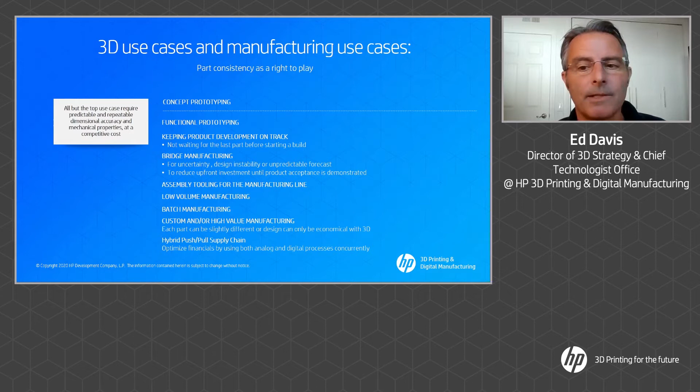It's to dispel a fallacy that's happened in the 3D print industry, which you've all probably heard at other events, that the beauty of 3D printing is you can go directly from design to production. The fact is, if you have quality requirements, part consistency requirements, you cannot skip that development phase.

You have to develop and validate that the part and the process together have the consistency of properties you're looking for. In that development phase, the people on the design side, demanding parts on the left-hand side, have to design the parts to the process they have in mind. And the people on the right-hand side supplying the parts need to tune the process to the specific part. And there's a reason for this: physics.

The reason is explained in the following slide. The physics of thermal processes—I'm talking specifically thermoplastic right now, but this applies to all thermal processes—is that part quality is both a function of the thermal history, which is a function of both the part geometry and the process settings.

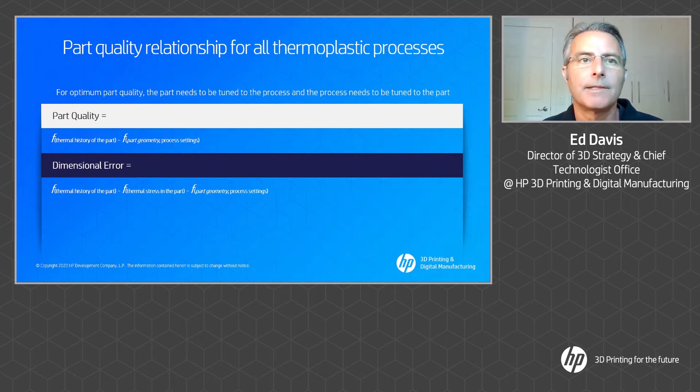So in the next slide, I'll show specifically what HP is doing to address this. On the design side, on the demand side, we have an MJF Engineering Handbook—MJF stands for Multi-Jet Fusion—which you can get online for free, or we offer a professional service for design for manufacture so that you can tune the design with the guidelines of MJF in mind.

On the right-hand side, we've introduced a process control software that allows the process engineer to tune the batch settings to the specific part and batch you have in mind. Using those two together, you go through this development phase, and then you can go into production with our production systems. This enables both the design and supply side to achieve a consistency of accuracy that we describe in the following slide.

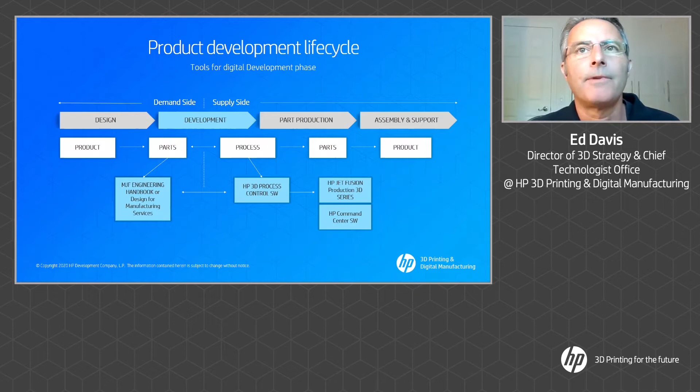There is an international tolerance grade, a standard for explaining what dimensional errors are possible. The first thing to note is that the small number is better than the large number.

If we go to the next slide, I'll show you the relationship. This is an international standard, both an ISO and an ANSI standard.

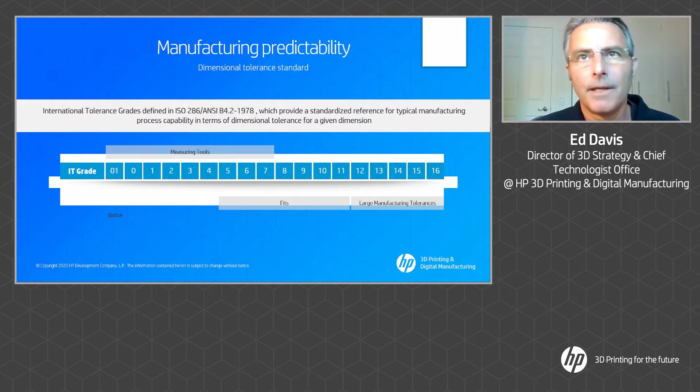People often ask, what's a good dimension to achieve for a multi-part mechanism? I often look at the 400 millimeter dimension, and that's quite a large error if you go to IT15. As you go to IT13, IT12, IT11, the numbers actually start to approach each other. So generally speaking, for multi-dimension mechanisms, you're looking for an IT13 or better to have good interaction between the different parts in a mechanism.

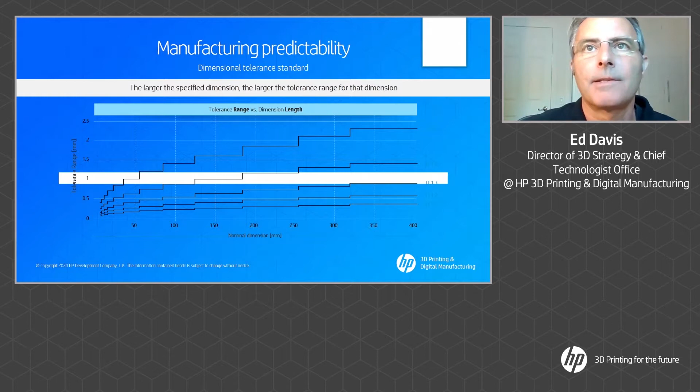If you go to the next slide, what we've been able to achieve with this process control software and following the design guidelines is the following. What you generally find with typical injection molding is that a highly precise mold will get you anywhere between 8 and 11 on this IT scale, which is phenomenal. It's actually very, very good tolerance.

To get better tolerances, you have to machine it. A normal mold will get you 11, 12 on this scale with a CPK of 1.33. Typical 3D processes are in the range of 15, 16, 17, and aluminum molds are generally 14, 15, 16. So as you see, typical 3D processes are far to the right on the scale.

With our process control software and following the design guidelines, and using the latest model 5200 to produce the parts, we're able to achieve an IT13 on the X and Y axes, and a little bit worse in the Z axis because the resolution is lower there. So what we're actually able to achieve is more direct competition with typical injection molds.

So what that allows a person to do then is open up the use cases beyond concept prototyping. And what this means to a program manager, I'll explain in the next slide.

The program manager is typically a hardware program manager, whether you're a program manager for an automobile, a printer, or any other device. What you're typically trying to do is balance the scope, the schedule, and the investments or resources to optimize the return on investment. The scope is the functionality of your product, and it needs to be different than the competition, and different than your previous version of the same product. Schedule, of course, is time, and investment is literally the money you put into resources or other investments.

So let's focus down into this program manager's world by going to the next slide. And what I want to focus on is how they balance investments versus cost.

Now, for 3D printing, they tell you the following story. If you advance to the next slide, please. They tell you that regardless of whether you're printing one part or two parts or 1,000 parts, the parts cost the same. That's not true. What I just explained is that you have to go through a development and validation phase, even with 3D printing.

You need to at least set up the quality processes for your 3D printer. Setting up the quality processes means programming a CMM to measure the parts, developing a holder to hold things in place while the thing measures things. It's going to cost you probably $1,000 or $2,000 just to set up the quality processes. So if you're going to make only one part and have quality requirements, it's going to cost you $2,000 plus the cost of the part. There's always an upfront cost, always a setup cost. There's no such thing as a straight line unless you skip that development phase, which you should not do unless you don't have quality requirements.

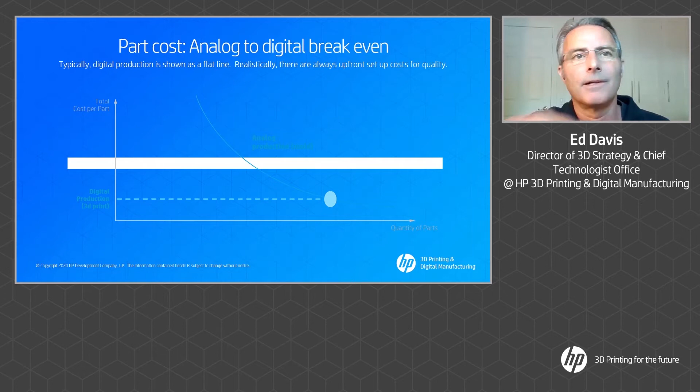A bigger problem with this curve is what they say: if you hit that break-even point, less than that break-even point, you should 3D print.

A worse problem is that many 3D processes are very expensive and don't produce that many parts. For example, if you were going to produce parts with a laser sintering machine, and that machine could produce 2,000 parts a year, but your production quantity per year was 10,000, you'd have to buy 5 laser sintering machines costing about $300,000 apiece and dedicate those to that part. That's $1.5 million. There's no break-even. You better buy a $20,000 mold, because that's a lot less expensive than 5 laser sintering machines. So the problem with this break-even story is the bad ratio of productivity divided by acquisition cost.

That's the case for most 3D print processes up until today, where we now have processes like multi-jet fusion, which are actually quite productive.

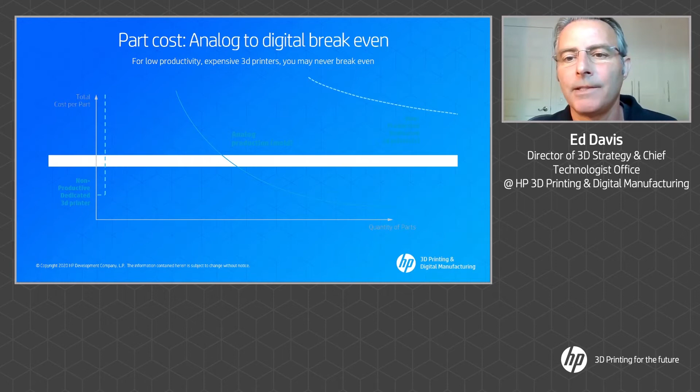Now, the thing I really don't like about this break-even story is that this is not how program managers generally do accounting. Let me show you how program managers generally do accounting.

You've got upfront costs on the left-hand side, and that's your return on investment. Then you introduce the product, and you have a P&L, a profit and loss statement for that product line, and the part cost is part of the loss of the P&L.

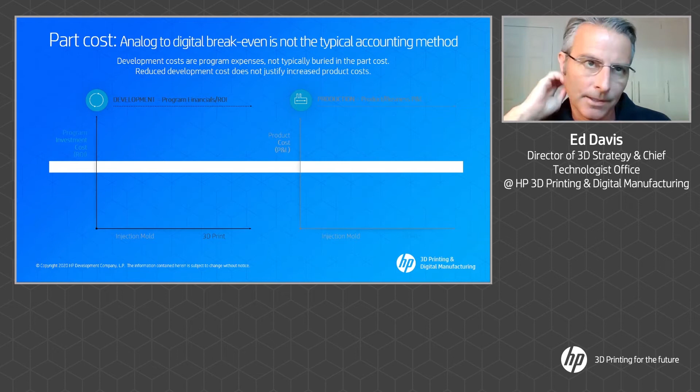So the story goes: in this break-even scenario, you pay a lot for the mold, and as a result you pay very little for the molded part on the right-hand side. With 3D printing, you pay nothing for upfront development, but the part costs you 10 times more.

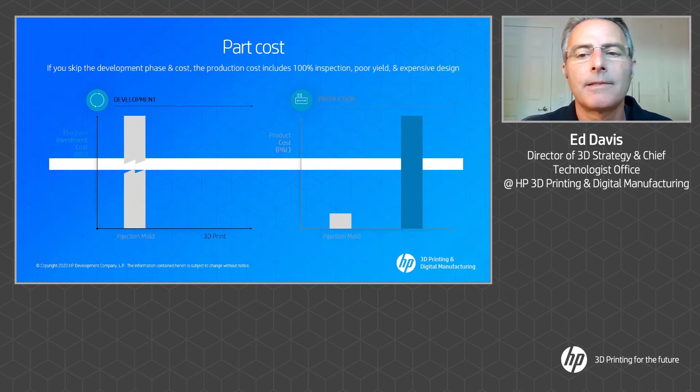But the fact is that this is not really how the situation looks. What really happens is that you can do process tuning, like with process control software, which takes a little bit of investment on the left-hand side, but it reduces the part cost on the right-hand side.

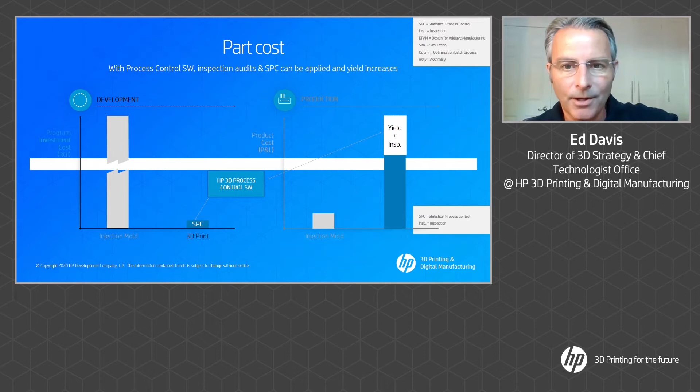You can also follow the design rules for the process and improve the quality even further. It requires more investment on the left side, but you reduce the cost even further.

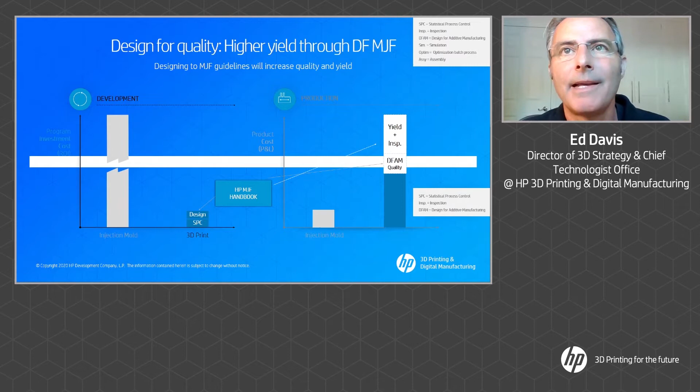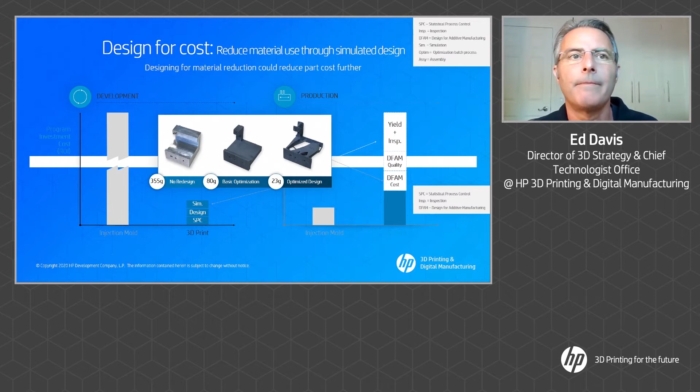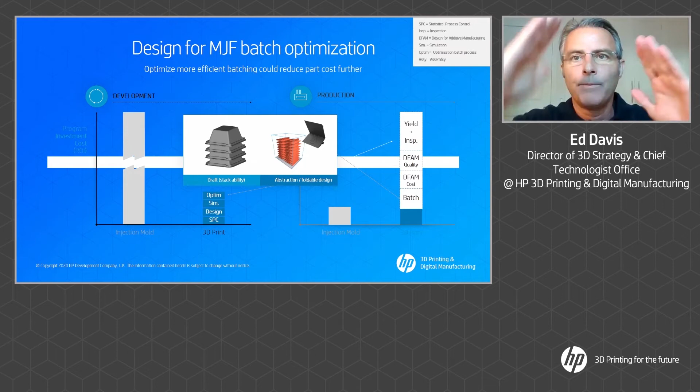You can apply material reduction through generative design and topology optimization and reduce that cost even further. Or you can make slight changes to the design so that you can fit more into a batch. For example, in that picture, if that stack of parts were square instead of angled, you could only fit so many in a batch. But by putting a slight angle, you can fit more into the batch.

So the batch, in fact, is the primary cost. And you start to approach the cost of that injection molded part by applying all of these techniques.

But oftentimes the cost efficiencies of injection molding are phenomenal, so your 3D printed part will still cost 2 or 3 times more than the injection molded cost, with one exception, which is shown next.

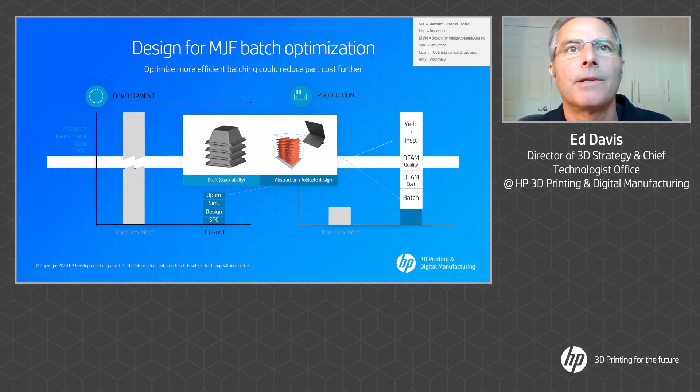When you have a design like this, and this is a real design in our 3D printers, it's an airflow system to keep the pens cool while we're printing.

It's actually shown upside down, but when we turned it into moldable parts, we had to break it into parts which could be molded, ending up as 6 parts plus assembly. If you 3D print it, you can print it out as one part without further assembly, which really optimizes the cost. And then, our friends at Siemens helped us optimize the airflow through that system.

So it actually has higher performance than the original version or the middle version. The fact here is that not only can you do cost optimization, but you can get a higher performing product. If you compare this integration of several parts to the cost of several injection molded parts plus assembly, the 3D printed version is actually more cost effective. So what can a program manager do with this information?

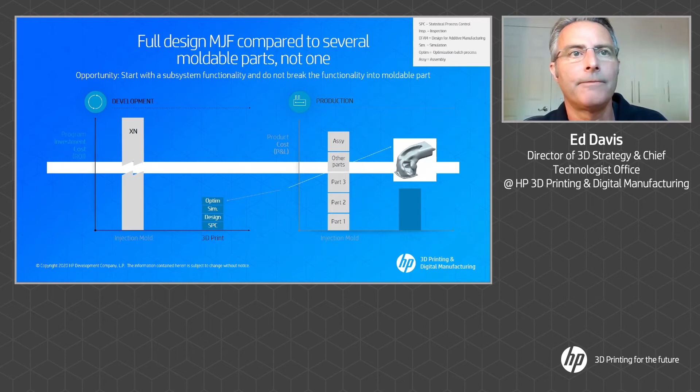Let's focus now on a story of investment versus time. If you could advance, please. Go ahead, one more.

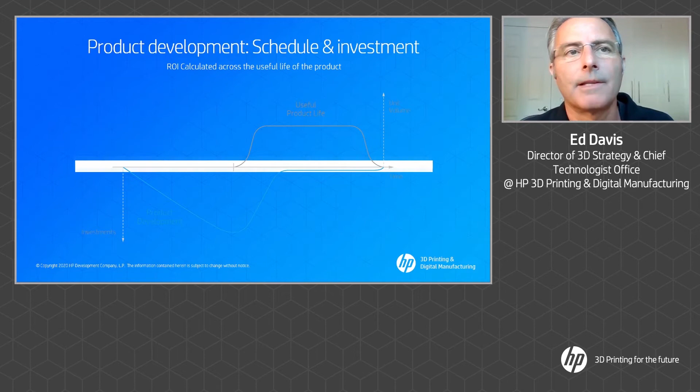You can think of this graph as return on investment. Now there's a serious concern in a program manager's mind when you're near the introduction of a product and you've got a technical issue and need to delay. What happens is your investment profile continues at the high rate — you don't go back to zero. You continue paying for everything until you solve that problem.

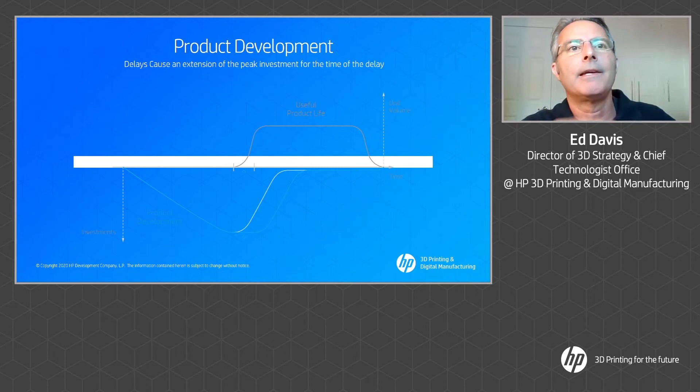When you start to delay, your return profile is actually shortened. You don't lose the ramp, but you shorten the competitive useful life of your product. Mercedes is not waiting for BMW to solve their problems, so the competitive life of your product becomes shorter. If you recalculate the return on investment at that point, you may conclude it's actually a bad return on investment.

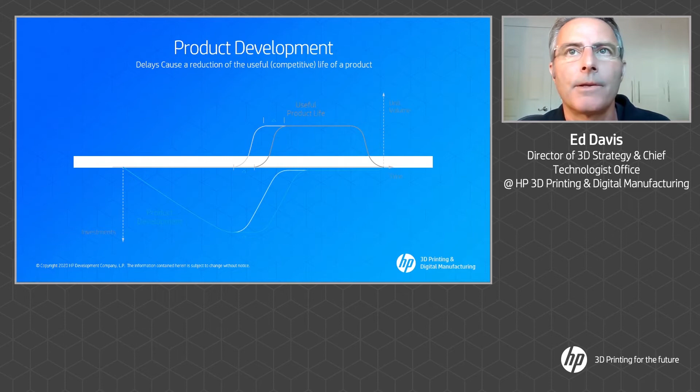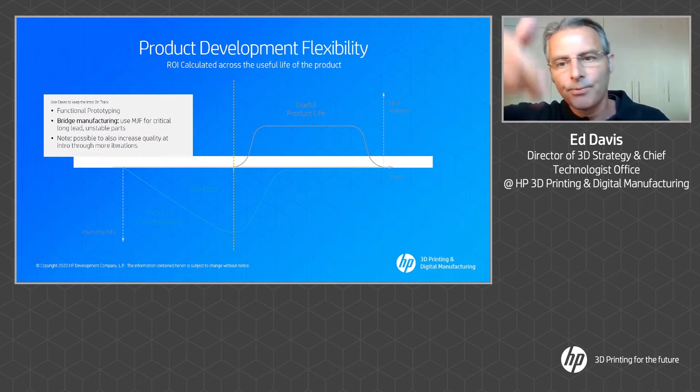Of course, you always convince yourself it's better to keep going than to start all over — you do some accounting games. So what 3D printing can do is actually enable that program manager to keep that schedule on track through strategies like bridge manufacturing, which we'll describe in the next section.

So with 3D printing, what do you get? You still go through a development and validation cycle, but it's much shorter than if you were injection molding the same part. With 3D printing, you can do that development and validation in a week, maybe two. With injection molding, depending on the complexity of the mold, it could take 10 to 20 weeks. So what you get with 3D printing is a shorter development and validation phase, which should allow you the following benefits.

What you get then is less time, less investment during the development phase, and a slightly longer production phase. At the end of life, this is how end-of-life parts are generally managed: when that BMW Model 3 is obsoleted, BMW does not keep producing spare parts on a monthly basis. Instead, generally speaking, they do a lifetime buy of spare parts and put those in inventory around the world in case that obsoleted BMW breaks in the next 10 or 15 years.

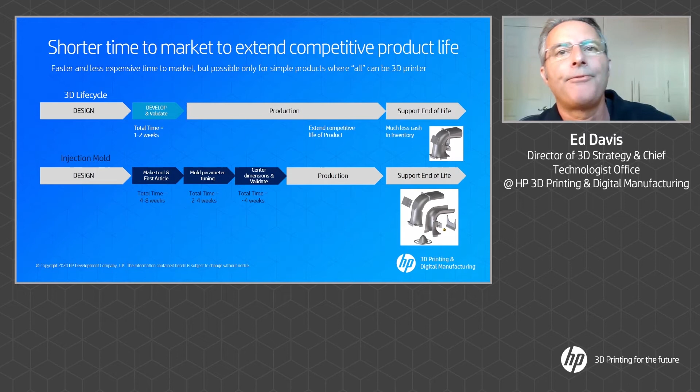Now, unfortunately, in an automobile, most of the parts, it's going to make sense financially to injection mold them. So this is not a real scenario for most parts in the BMW Model 3.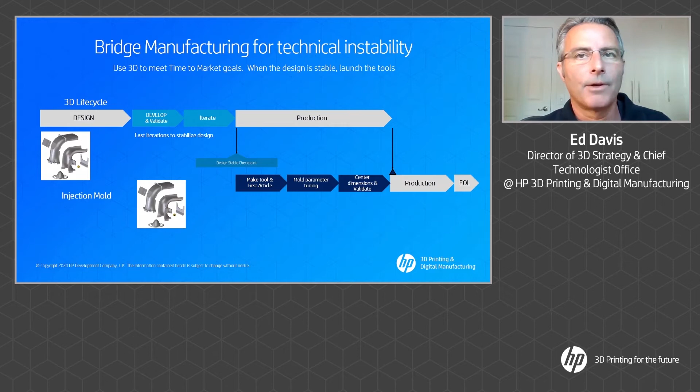And when those molds are ready, switch production from 3D printing to the more cost-efficient injection molding. This is bridge manufacturing. It's bridge manufacturing because you start with a type of manufacturing bridging to your final production method, which is most likely more cost effective. So this is one reason for bridge manufacturing.

In the next slide, there's kind of the opposite story, which is up on the top: you start with an injection molded version, you introduce the product, and you find a catastrophic failure in the field. When you find that catastrophic failure in the field, what I mean by catastrophic failure is a recall situation. I would argue that it makes more sense to develop and validate with 3D printing, restart production to address the problem, and then switch back to injection molding at the end once that mold is ready.

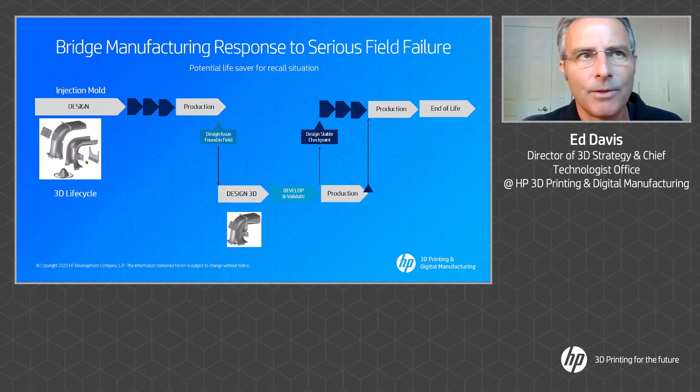The final reason you may do bridge manufacturing is in the following slide, which may be important in today's situation, especially for small companies. You may not have money this fiscal year to continue paying for your tooling, so you can delay tooling decisions by bridge manufacturing as well.

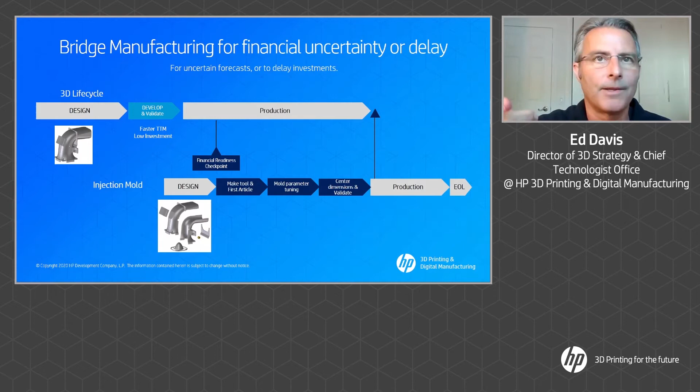Now, if you develop and validate the 3D printed version, and then you develop and validate the injection molded version for this bridging strategy, why would you do end of life with the molded parts? You wouldn't. What you would do at the end of life is switch back to 3D printing so that you don't have to stick all those parts in inventory.

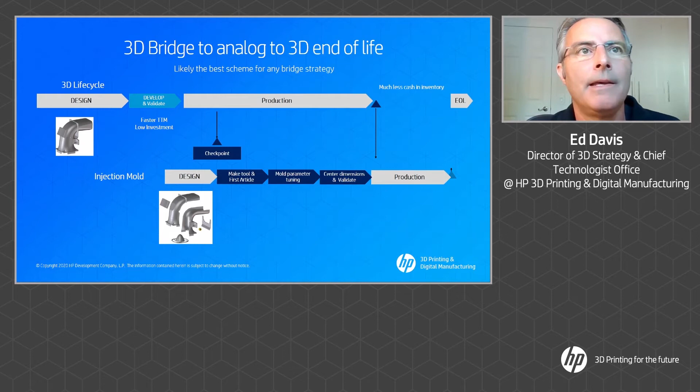And this leads us to the most complicated scenario, which is hybrid resilient supply chain, where you intentionally develop and validate a 3D printed version and then develop and validate an injection molded version. Hybrid supply chain means that you're using two methods for production at the same time. If you look up the definition, it literally means you incorporate both a cost-effective method, which could be injection molding, and an agile method, which is 3D printing.

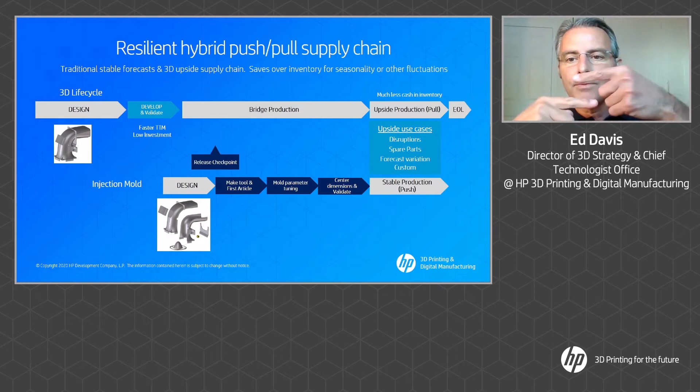Now, with this model, during normal production, your push production you would do through the cost-effective method, and your pull production, meaning on-demand production, you would do with 3D printing. Pull production could be spare parts, or it could be unforeseen forecasts. In this way, with this hybrid approach, you get all the benefits of pure pull production in that you only fabricate what's necessary.

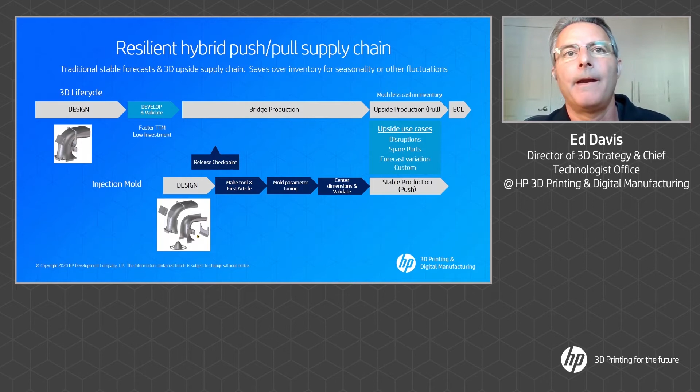And this leads us to the following slide: what happens when you have supply chain disruptions? I'll argue that this hybrid supply chain can help you with supply chain disruptions. For those of you who don't work in supply chain, disruptions happen all the time.

We heard about it this year because COVID was a very big disruption, but there's always some level of disruption going on in the world, whether it's a tsunami in Thailand, a volcano in Iceland, or a strike of the dock workers in Los Angeles. There's always some sort of disruption. So having this hybrid supply chain actually allows you to switch between supply on demand when these disruptions occur.

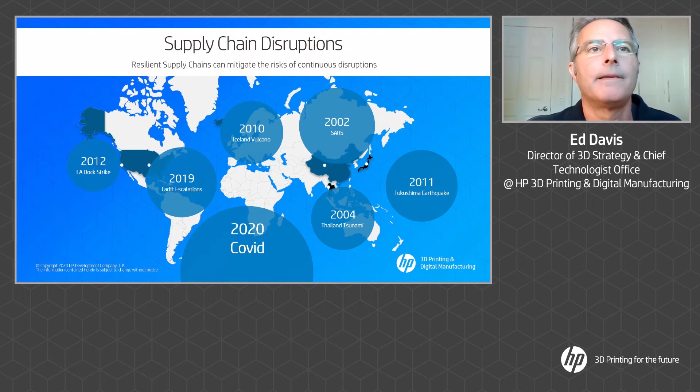Now, how we've used this in the case of COVID is shown in the following slide, and I use this to demonstrate how quickly you can get things done. When COVID hit in March, our 3D print team in Barcelona knew some people at the Hospital Sant Pau, and the hospital said, look, we're running out of face shields, can you guys help us?

Our team said, yeah, we probably can, but we never designed face shields before. So they met with the doctors on a Saturday afternoon, got the design requirements for the face shield. There are three requirements: it has to prevent splashing, it has to have optical clarity so the doctor can see what he's doing, and all of the parts need to pass an impact test.

So they got the requirements from the doctors, came up with the first design, printed it out, had it ready for Monday morning, and reviewed the design with the doctor. They went through, I think, six iterations throughout the week. By the end of the week, they had passed the requirements. So they went through the development and validation in one week, and then they started printing out these face shields for the doctors in the hospital in Sant Pau.

At the same time, we uploaded our design to the internet, and a lot of our customers and partners started printing them for their local hospitals. So this is a description of what we mean by supply chain disruption. How do you deal with that? One week development and validation, immediate distribution because it's digital.

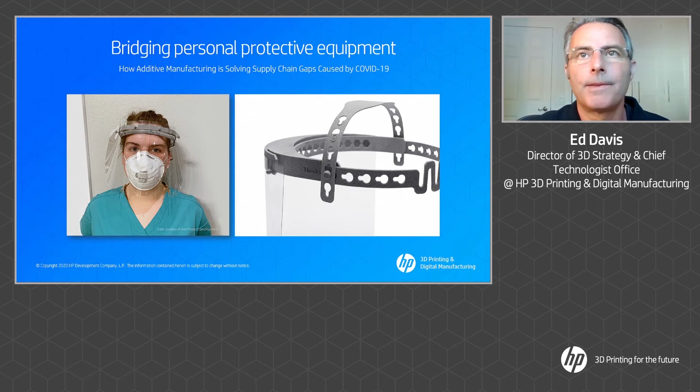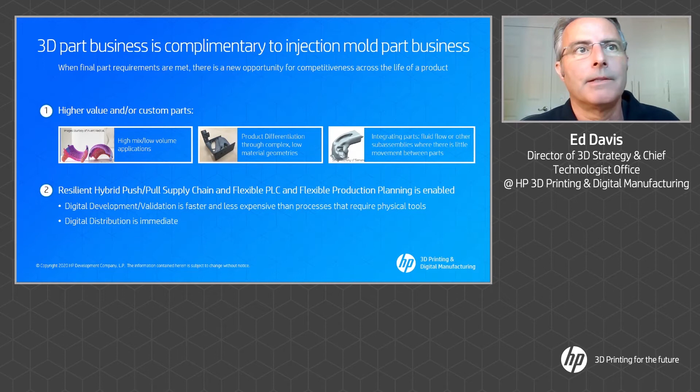So moving on to the next point, the value of 3D printing then is not to replace injection molding, it's to complement injection molding, either because you have higher value parts or customization needs, or because you want this flexibility in the supply chain. Those are two different reasons for using 3D printing: to complement injection molding, not to take the place of it. Now let's talk about the future, going to the next slide.

So we're going to go through several topics. I'm going to talk through one at a time. I'm going to do a little bit of level setting just to make sure everybody's on the same page. And so we're going to start with megatrends.

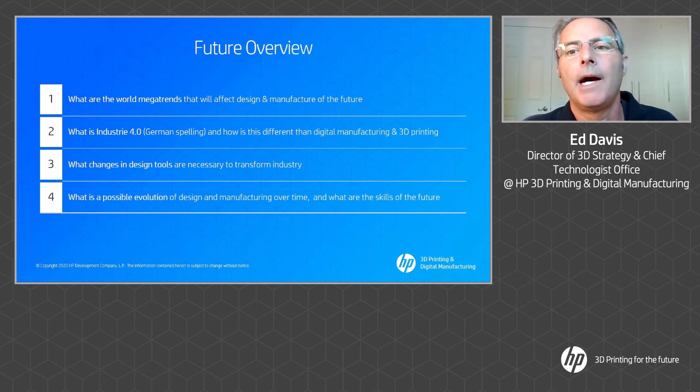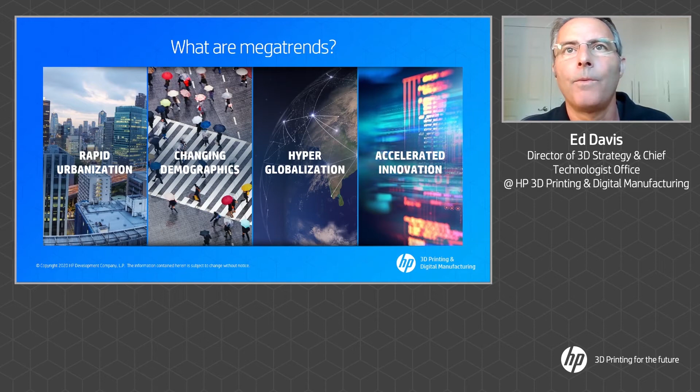If you go to the next slide, megatrends is not an HP term. They are the major macro trends that are happening in the world, and you can Google these. There are companies that do research on these megatrends. HP does their own research, and we do our own research for the following reason.

If you go to the next slide, because we intend to be in business 10 years from now, 20 years from now, we're looking to understand the megatrends, to understand what sort of talent we need to acquire or develop. What are the processes and tools of the future? Who are our customers in the future? What are they looking for? And what are the new business models? So we're doing this analysis.

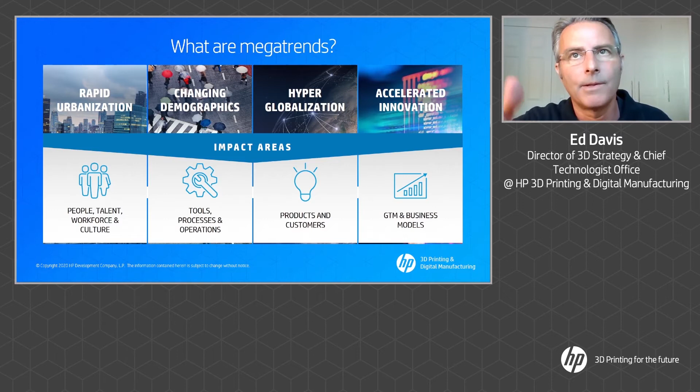It's actually available online, our analysis is available for free online. I think we've got the links at the end. We do it for ourselves because we're trying to stay on top of these trends for our own sake. Now, in the next slide, HP breaks these megatrends into four major categories because we have determined that these four major categories are the most important for our business. And then we break it into sub-themes shown below each of the columns.

I'm not going to go through this in boring detail, but rapid urbanization is, in fact, the movement of people towards where the jobs are. And I don't mean necessarily that people are moving to the middle of the city. What I mean is people move where the jobs are. And if the jobs are in Los Angeles County, people will be moving to Los Angeles County.

Changing demographics—this is just the aging population. What's going on is that there's less than 2 children per couple in most of the developed world, so that on average, the age of the population is going up.

To emphasize this automation, I want to talk about Industrie 4.0 and clarify some terms. Industrie 4.0 is the use of data across the entire product life cycle to make that entire product life cycle more efficient. It is broader than Manufacturing 4.0. Manufacturing 4.0 could be thought of as the smart factory—using the data in manufacturing to make manufacturing more effective and efficient.

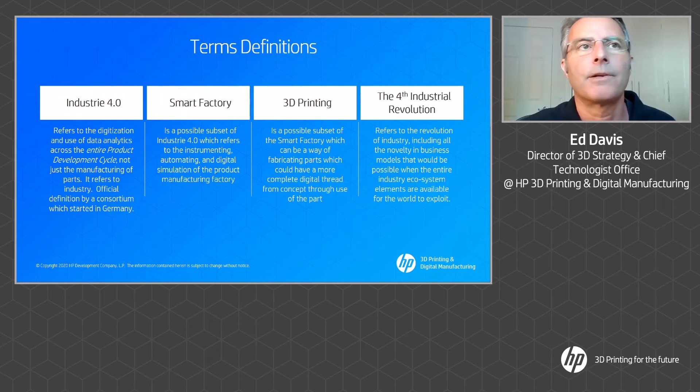Now, to discuss automation, let me talk about Industrie 4.0 just to make sure we're all on the same page. Here, I've broken the product life cycle into more phases than I previously had. I've given product development just one bubble because I didn't need to emphasize it. And then I gave manufacturing 4 bubbles: part production, subsystem assembly, top-level assembly, and distribution. Those 4 are what's considered manufacturing.

Those 4 could be Manufacturing 4.0. But then you sell the product, and you install the product, and the customer uses the product, and you repair the product, and you replace the product. That is the entire product life cycle. Industrie 4.0 has that full breadth.

Now, the way that this looks, it's like a perfect digital thread all the way across all of these bubbles, right? That's not reality. What reality is shown in the following slide—generally speaking, if you go to the next slide, please.

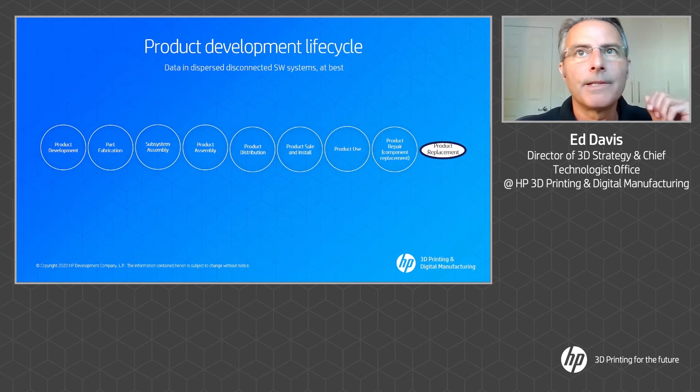Generally speaking, product development is done in one company in one country. All this manufacturing is generally done in other companies in other countries. And what literally happens is that the information in product development is transferred to all of these manufacturing bubbles through an email, and through these little people that are running from bubble to bubble—little people getting on airplanes and going to this other country and explaining the email.

And so the information flow going from the left to the right tends to have a delay. I would say that the average delay is several days, or maybe a week, maybe two. And so information flow, real information flow, going left to right—one, it's not a digital thread, it's emails and people. And two, it's kind of slow.

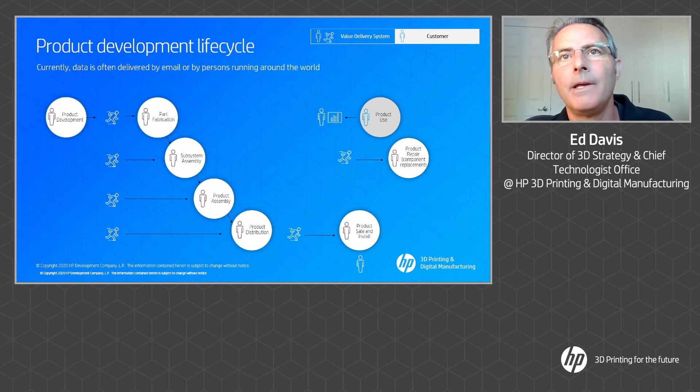There's a worse situation shown in the next slide, which is if you're one of these repair guys over on the right-hand side and you find a new problem in the field and you need to find the root cause, you have to go backwards through that value delivery chain and understand what happened. Did something happen wrong in distribution? Did something happen wrong in assembly? Were the parts not correct? Did you find the problem in R&D, but you ignored it somehow? Did the customer use the product in such a way you had not anticipated, and that caused a new failure mode? There's all these possibilities.

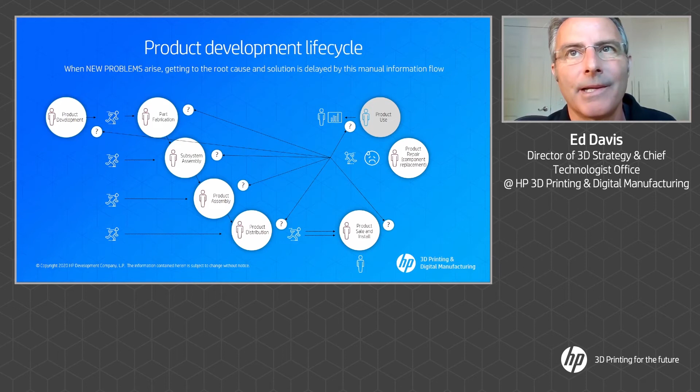And it's better shown in the next slide, which is that the idea of Industry 4.0 is that you're always monitoring all the data in that product lifecycle to always provide real-time feedback to all of the bubbles in that. And that data analytics that we showed at the bottom of the previous slide is actually the center—they're digital twins, virtual versions of the same system.

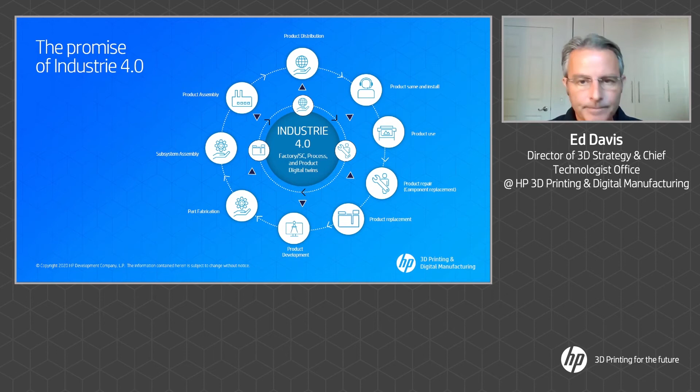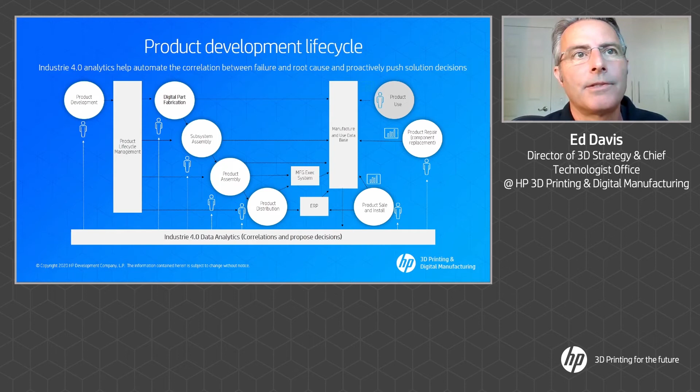So then what can you do when parts are digital? If the parts are digital, then go ahead and advance. What is a digital part? Go to the next slide, please.

When we introduced the technology years ago, we talked about voxel control - being able to manipulate properties on a dot-by-dot basis. We did that because, in fact, we've got a dot-by-dot process. And our strategy still is, in the long term, voxel control.

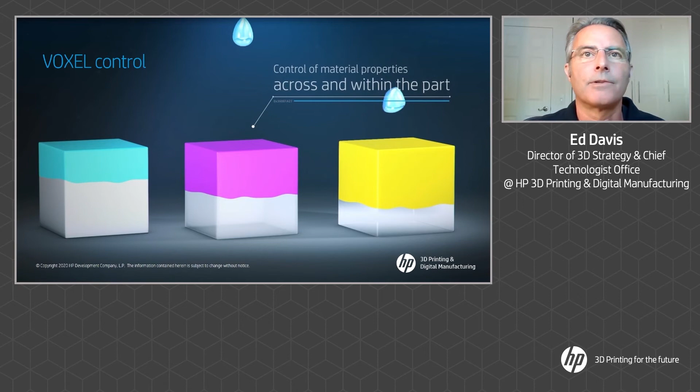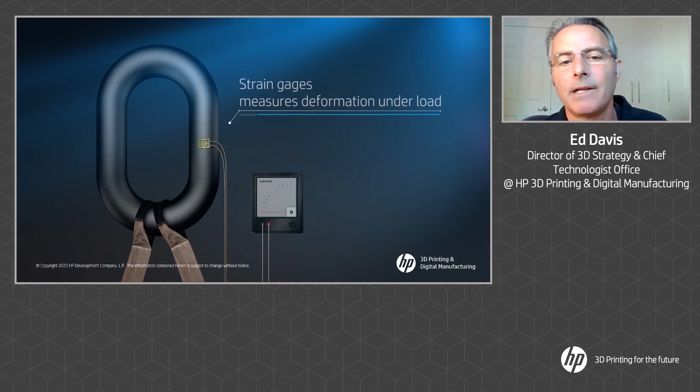One of the things you can do with voxel control is, if you had metallic inks, you can start to embed sensors into mechanical parts. You could go and embed more than sensors - you can embed electronics. So this would be a real digital part. Not only is the product digital, but the part itself is digital.

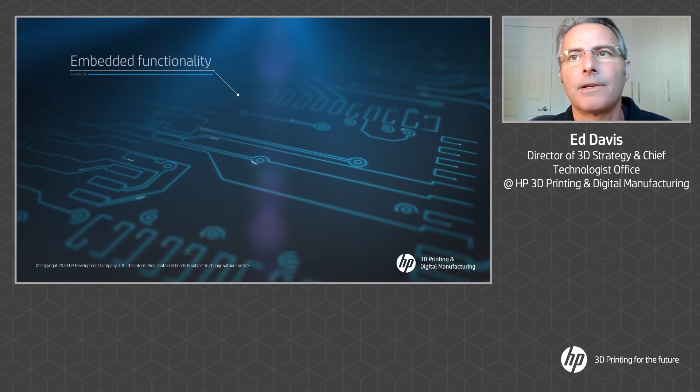So what happened with this voxel control story is the following. We don't talk a lot about voxel control anymore, even though it's the long-term strategy, because it's first important to get into manufacturing. Because if you're not clearly in manufacturing of parts, then voxel control is kind of academically interesting, but not otherwise interesting. Why would you prototype the embedding of electronics into a mechanical part if I could not produce those parts in the volumes and at the cost that I was interested in? So we focus now our conversation on getting into manufacturing, although the long-term plan still is to get all this voxel control, including the embedding of electronics into parts.

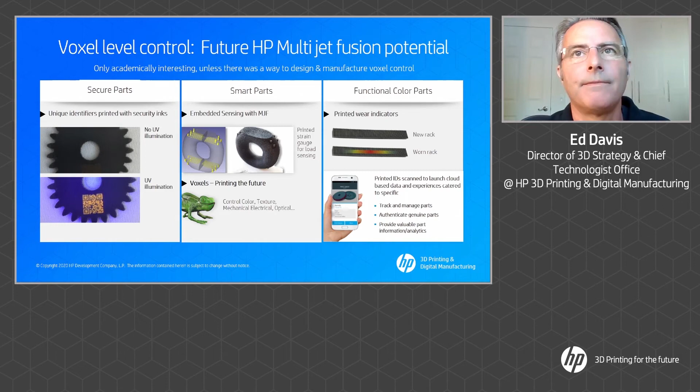What you heard also when we introduced the technology, you can still Google this, I think it's still on YouTube - we showed a visionary video of, in the long term, what you can do is print out something as complicated as this electromechanical robotic chameleon without further assembly.

Now, there's a couple of challenges for making this vision a reality. The first is that we need to invent all of this voxel control, all of these agents, all of this chemistry. It requires a lot of innovation. And so that's going to take us some time.

But the other thing that needs to change is, if we could print this out without further assembly, how would you possibly design it? Would you say voxel number one has this mechanical property, this electrical property, this color, this texture? You can't do voxel by voxel design - it would take you forever. So what has to evolve is the design tools need to evolve towards what's called a generative design tool, which I'll describe next.

The general design process is: the engineer sets the design intent - I need a mechanism that does this, fits within this space, connects to the system here and here. Then the engineer goes to the CAD system, designs. And then they go to a simulation tool and simulate how well those designs meet the intent. And then they kind of go through iterations until they're happy.

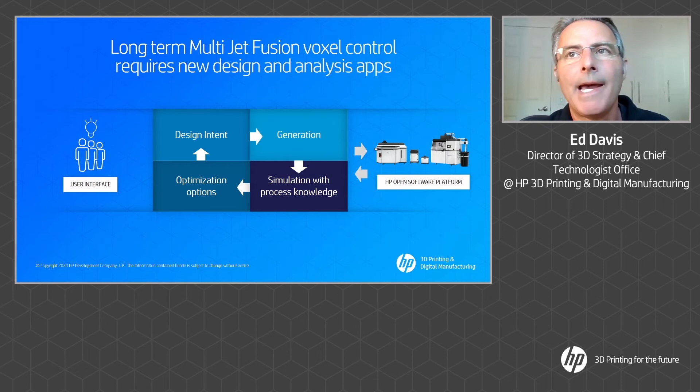What happens in generative design is the following: the CAD tool and the simulation tool are integrated. The design engineer still sets the design intent, but this integrated generative design and simulation tool designs options while simulating how well those options meet the design intent, and then presents the options back to the design engineer saying, look, I came up with these designs - here's 10 options, option 3, option 7 best meet your designs, but they're not perfect, and if you could reduce constraint number 5, I can do another iteration. This is automating the manual process of CAD and simulation. And the key is the integration of design and simulation.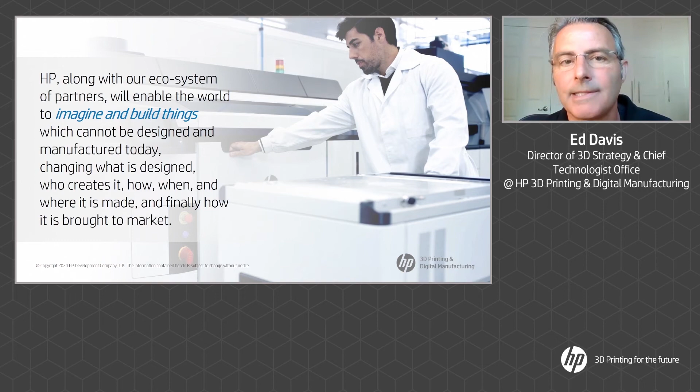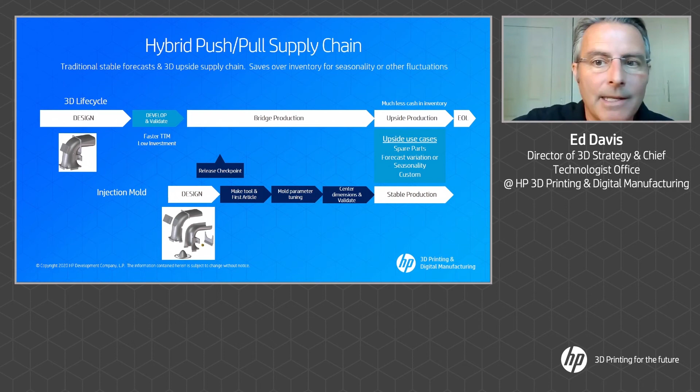Now, how the story begins is in the next slide. How the story begins is today, we can do hybrid manufacturing. We can do hybrid manufacturing today, which allows us to match production to demand, which then allows us to reduce our dependencies on inventories and warehouses, which puts creative tension on the design tools, which leads us to the design tools enable.

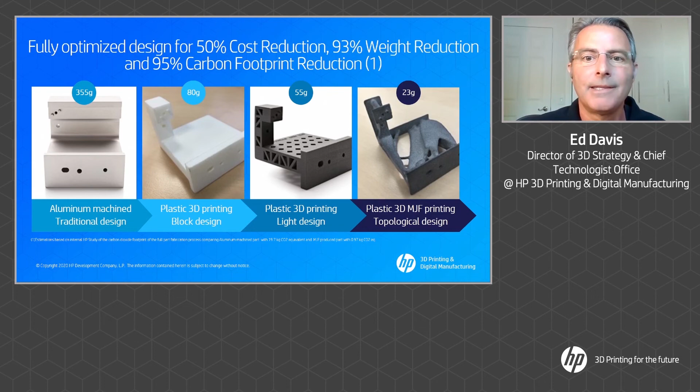The design tools enable you to reduce the use of material through topology optimization, reducing the weight significantly, reducing the use of material significantly, which then allows you to waste less material and to improve cost. And if it's a lighter system, to reduce transport costs. And if it happens to be an automobile or something else, to actually reduce the energy in the use.

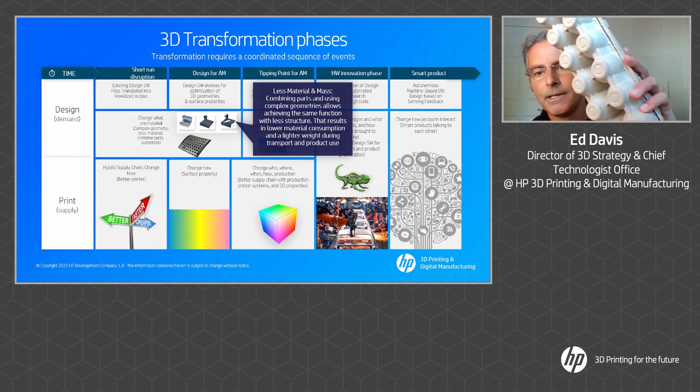This little multiple densely spaced holes, people say, what is that? One example of what you could do with multiple densely spaced holes are molded fiber molds. What is molded fiber? Molded fiber is a type of packaging that has been replacing polystyrene foam in packaging for a number of years. It's typical in these egg crates. Molded fiber is the material that this is made out of.

To make this, in fact, you have to do a very, very manual process that I'll describe in a second. Well, our egg crate people, the people who are interested in molded fiber, know. If you also look at the packaging in typical consumer electronics like PCs, a lot of times we have these end caps made out of polystyrene.

HP has, part of our sustainability strategy, a goal of replacing single-use plastic like this polystyrene foam, 75% of it by 2025. And so it's not just egg crates, it's actually a lot of packaging that currently or used to have polystyrene foam should start to be replaced with something that takes recycled paper products to turn it into paper pulp to make a packaging which is perfectly recyclable back into more packaging in the future.

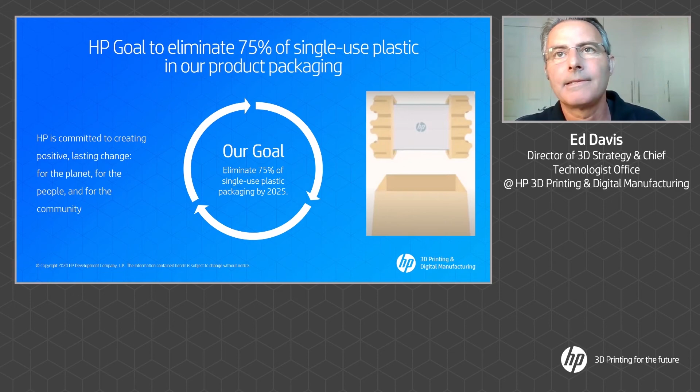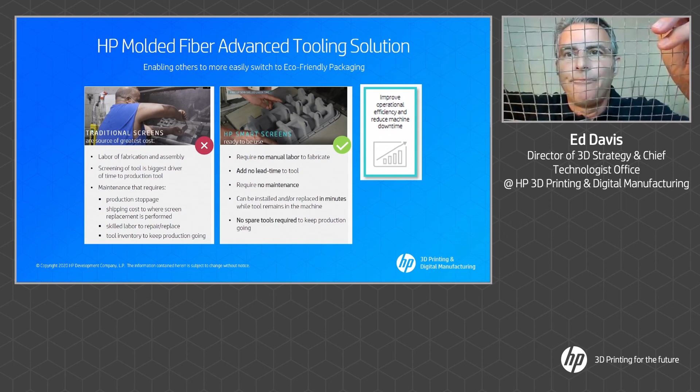So now why aren't we going faster? Well, one of the reasons we're not going faster is the following: the process for making the screens for this molded fiber slurry to pass through is a manual process. If you look at something like this, what you do is you cut out a piece of, it's actually tighter meshes than this, I use this to illustrate. You cut out reliefs, you fold the thing into place, you pound it against the form, and then you stitch it back together. It's a very manual process. And you could imagine being so artisanal, it's not got a lot of quality control behind it.

So what HP has done, we've now announced that we're going to be entering into the molded fiber tooling business, and you can Google HP molded fiber advanced tooling solution. We are taking orders for molded fiber molds that we will finish the design of the mold for you, print out the molds, and send you the molds.

So what we're trying to do is facilitate that more people than just HP can actually take this journey of replacing polystyrene.

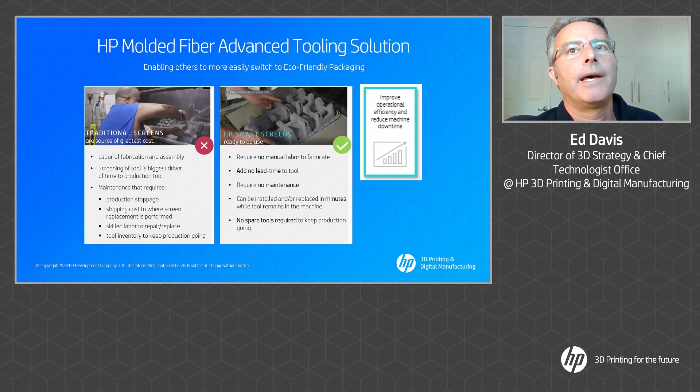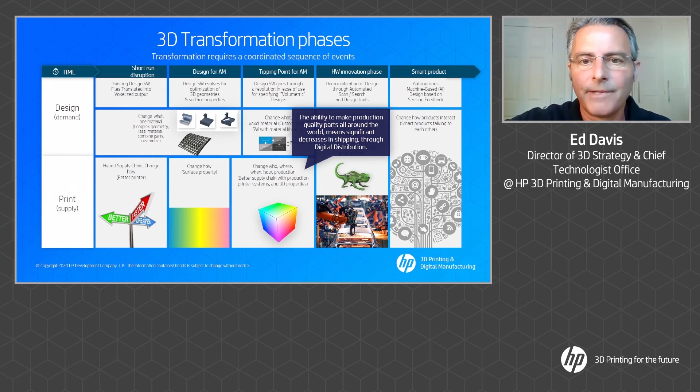When you can finally re-engineer supply chains and do local production, not only do you reduce inventories and warehouse dependencies, you also reduce shipping requirements.

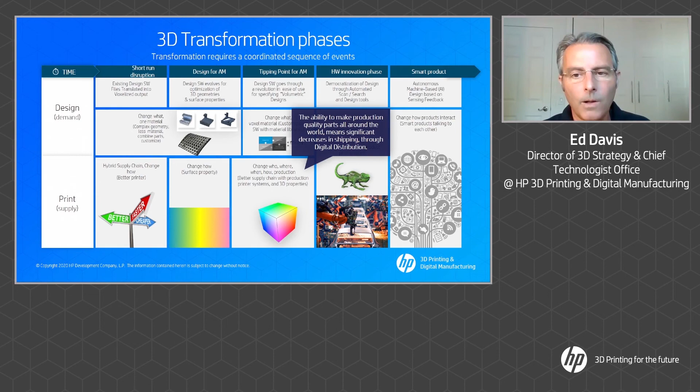All of the sustainability story for 3D printing includes these elements: the ability to reduce inventory, reduce shipping, use less material, have less waste, and move towards a more fully recyclable world. That's the summary for sustainability.

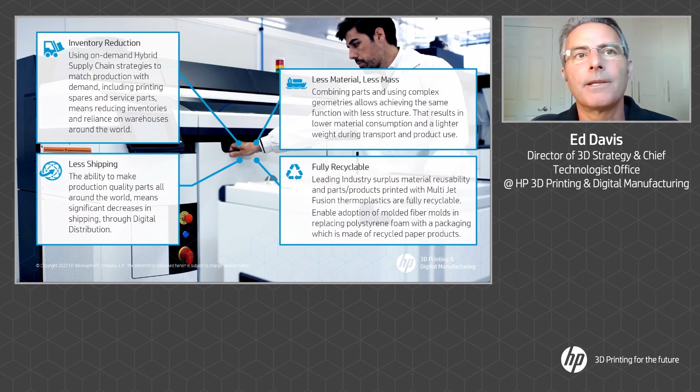Now, to close, let's go to the final slide. Let me go back to megatrends.

I will argue that with this COVID situation, these megatrends have been emphasized and accelerated. Now that people have lost jobs, maybe in one part of the country, they will be moving towards where there's a job. Sometimes you have no choice, right?

So the rapid movement towards where the jobs are will be accelerated by the current situation. The need for healthcare and digital health is being emphasized by COVID. Hyperglobalization is hyperconnectivity—we're all doing virtual events these days, and that's been accelerated.

And in the case of innovation in 3D printing, we're seeing the advantages of 3D printing for use in hybrid supply chains has been emphasized by the current situation of supply chain disruption. So I will argue that these megatrends will not only continue, they'll be emphasized by what we've gone through in the past year.

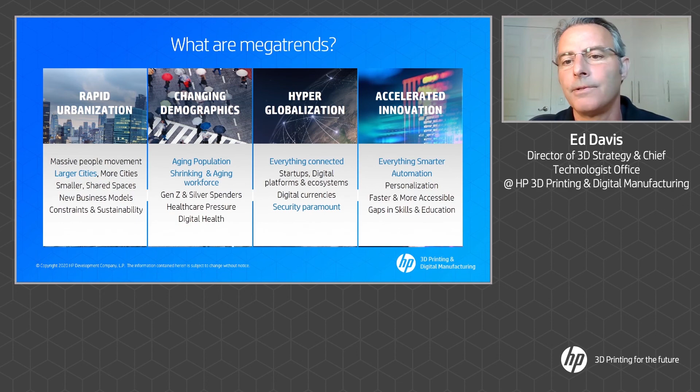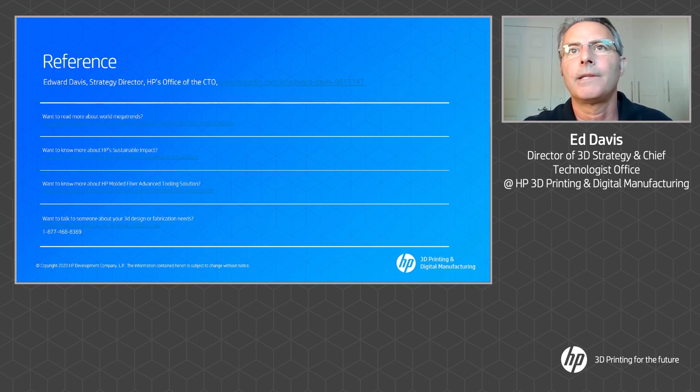First of all, thank you very much, Ed. The first question is more of a comment: an aspect not covered is using 3D printing for the injection mold for conformal cooling, improved efficiency, and to accelerate the mold build.

Yeah, this presentation was kind of made to talk about direct printing. There is the possibility to do printing of molds, generally with metal processes.

In the case of printing with molds, there's actually a real specific advantage. You may be able, with this conformal cooling, to get better quality than you would get from a standard mold. Or alternatively, you may be able to accelerate the process time for the parts and maintain quality, which then allows you to reduce cost. So conformal cooling is a real use case for metal 3D print processes.

That's correct, no denial. Okay, I think we have time for just one more.

This question has to do with global climate change. Many believe that global climate change is the most pressing problem facing mankind. How is climate change going to affect megatrends?